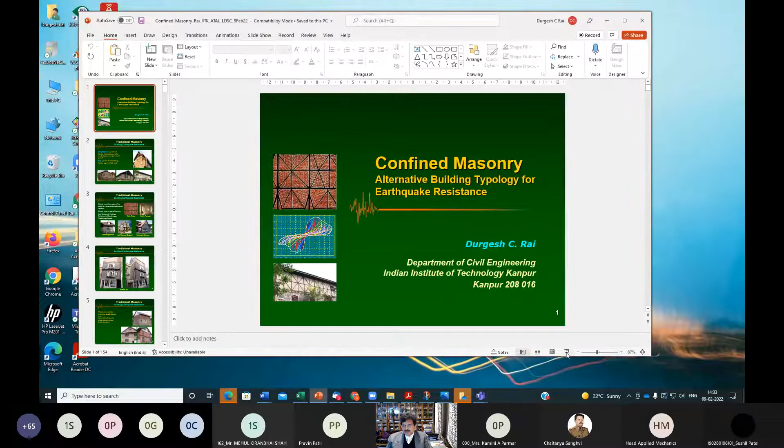Thank you. Good afternoon to participants, and it is really a pleasure to again connect with you, now with a different topic. As Mr. Patel mentioned, in this hour and a half we will talk about confined masonry, an alternative building typology for earthquake resistance.

We will see that earthquake resistance is not a new phenomenon. Earthquakes have been as old as the earth is, and human civilization has always come up with ideas, schemes, and techniques to protect dwellings and structures from devastating earthquakes. The problem is still the same as it was centuries earlier.

If you visit areas which have been more earthquake prone, such as in our Himalayan regions, you will see that the construction is of a little different kind than what we see in modern construction, especially after the colonial period, and the kind of influence that the British had on our construction in every sphere of life—building construction was no exception.

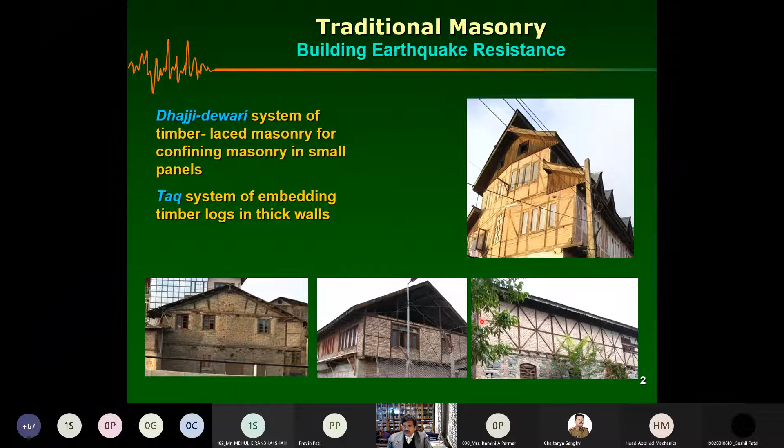The other system has logs of timber arranged in horizontal and sometimes vertical fashion, connecting thick walls that go all around the perimeter of the structure. There are definite advantages to such constructions, especially in earthquakes, and it can also be a very artistic expression for the structure.

This is not only found in India. If you go around the world to countries often visited by earthquakes, you see similar systems, like the Himis system in Turkey, in Portugal you have Gaiola, which is again timber-laced masonry, and similar systems in France, England, and Germany.

This is for earthquakes and also for other dynamic loads that can come from blasts or mining. This store is in Durham downtown, and Durham used to be a mining town in the UK. Because of mining blasts, the grounds used to shake, so structures had to be built to resist that shaking—again you can see timber-lace masonry. This building is preserved to show how all the buildings were in this town 300-400 years ago, when it was known for mining.

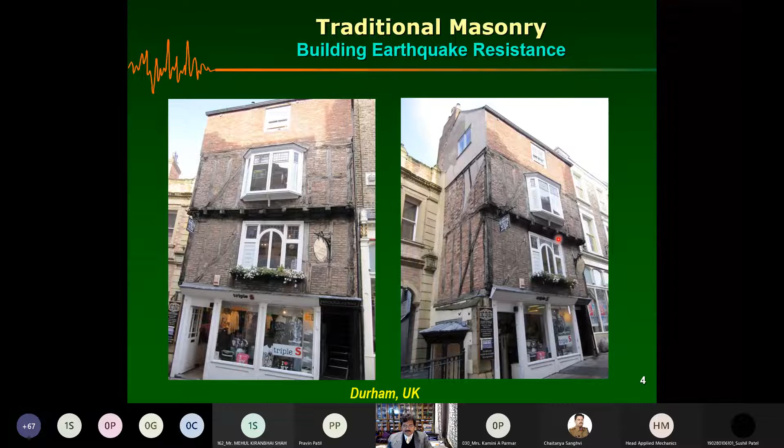There can be many variations—using dressed or undressed stone where more shear is expected, but as you go up, there could be a full brick wall, and further up the amount of masonry reduces in thickness while the timber frame increases. This could be just a half brick wall, so that's how you can see the transitions.

If you go really far back, even in Greek and Roman culture, you will also see the judicious use of timber and stone masonry.

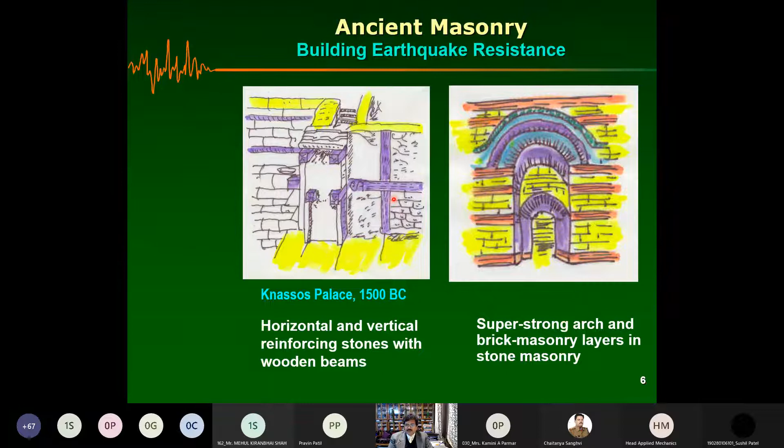Also consider the stone masonry and brick masonry, the layers of brick masonry. The central theme is that you have a stronger, more stiff stone interspersed with softer, flexible brick. Same thing with timber - timber is good in tension and provides binding and bending strength compared to the somewhat weaker masonry. So people have been using these dissimilar materials to create a structure which is more resilient.

There are many ways to explain what the timber is doing. First, you can think of it as a shock absorber, because the softer material is more compressible compared to the surrounding stiffer material. Another function is that it provides a slip plane where these units of masonry can move and slide along, dissipating energy through friction. It also adds to the flexibility of the system.

But being connected, it provides a kind of tying action, not only in the vertical plane but also in the horizontal plane, maintaining the overall configuration of the structure. Further, masonry is filled in small panels, reducing the span between supports. So the effective slenderness of this segment is very small compared to if there were no support, which would be the unsupported height. That enhances its out-of-plane stability.

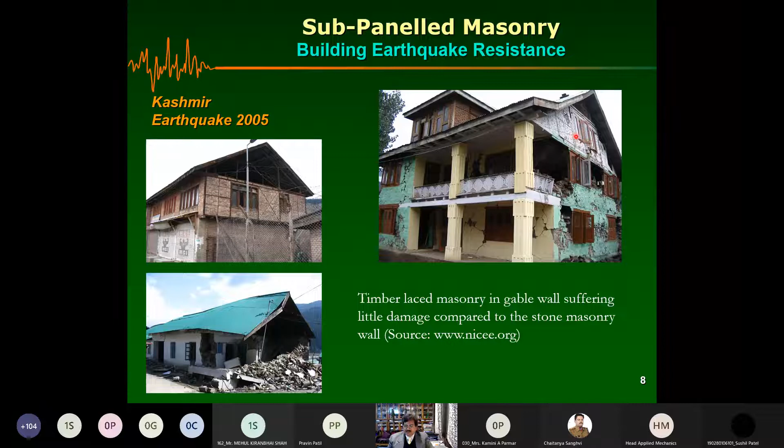In terms of performance, you can see that their performance is much better than the so-called modern random rubble masonry or ashlar masonry. Even this very old and not properly maintained building has done pretty well, unlike what you'd expect from a combination of random rubble and Dhajji-dewari, where you'd expect larger acceleration. The masonry has remained quite intact, with similar performance in many structures.

I'd like to take you to a building constructed in 1932 for the Medical Research Center for a German group. They wanted this research center built at Naggar, near Shimla in Himachal Pradesh, and hired an architect from New York. He visited the area and found that people traditionally had been building timber-frame laced masonry structures, and such structures had done well in the 1905 Kangra earthquake, where British-built structures did not do as well. So all the reconstruction, even by the British, was in this Dhajji-dewari construction. He proposed and built this complex in 1932. These are some images - this structure still stands today after surviving many, not big, but definitely many small earthquakes. This picture was taken in 2009.

The first magazine of the center talks about the building. I'm quoting: 'This method of construction is known here as Dhajji Diwar construction and has proved to be the best, if not the only, method of construction that resists earthquakes, which used to be quite frequent in this region. Most of the government buildings in Dharmsala, for instance, are built in this style and have proved to be the best. It is interesting that in its essential principle, this mode of building rather resembles the steel structures of modern skyscrapers' - as you can see, coming from an architect from New York - 'with the difference, of course, that wooden beams are used instead of steel girders. Thus, the wisdom of the people in its own way found the best solution, how to give utmost binding strength and rigidity with the local material available.'

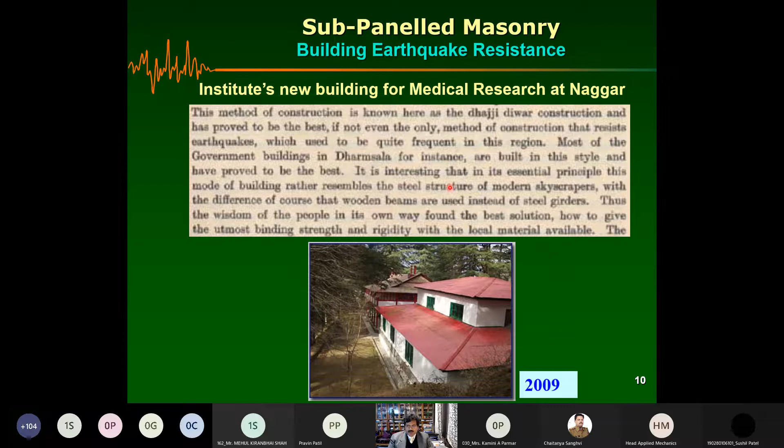So the point is that such structures have done well. Now, people talk about how we can't use timber because timber is not available, and it again leads to deforestation and things like that.

And there are options, you can continue the same concept with the modern materials, such as in this case, we did some experiment in our lab where instead of timber, we have used these precast beams or the tie elements. So in this way, this interior grid is created by the precast. And then when we subject it to the lateral loads, as we have shown in my previous lecture, they have sufficient deformation, or rather deformability, going beyond. Masonry usually cracks at 0.5%, and now you're going up to 2.5% or at least 2%, while maintaining significant

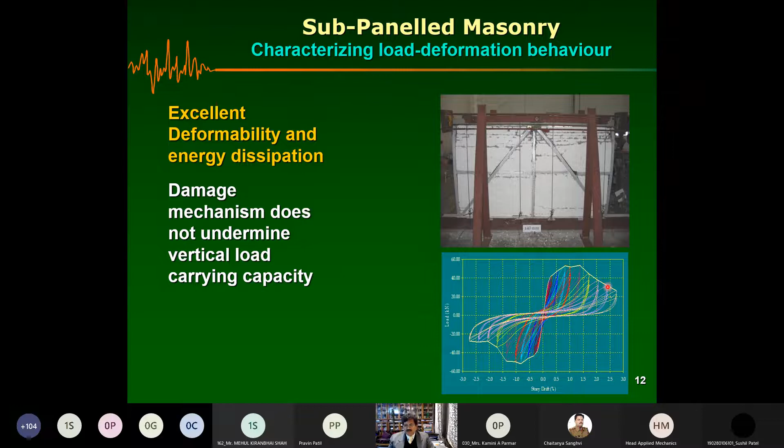strength, you see. And you can play with whether these members are continuous or they stop, only horizontal members continue, or you can have the diagonal members continuing. So you can play with this strength and stiffness and still design your wall. And what we are doing is that at least you need the confinement from all around, and then internal confinement can add to your stiffness.

If there's only horizontal, vertical, not continuing, there is a marginal improvement in the stiffness. But the moment you put the diagonals, then you increase the stiffness significantly. So if you want this stiffness, then you can add the diagonals. And if you want only confinement and not so much the increase in stiffness, because increase in stiffness means a decrease in the natural period. And if you remember the response spectrum, you tend to attract more forces.

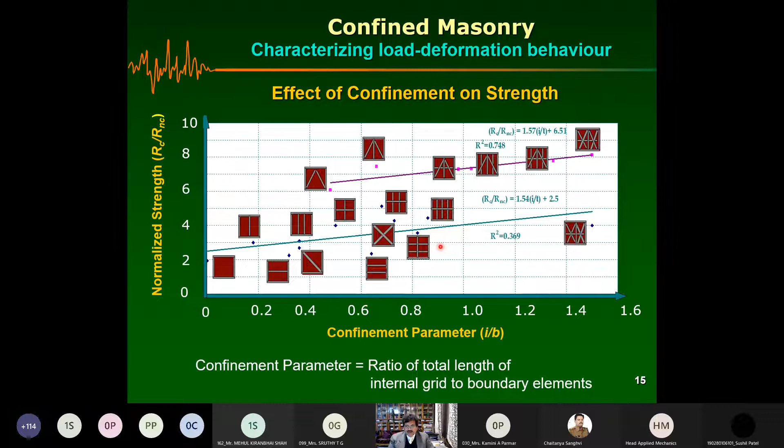OK, so we need to have a suitable balance of stiffness, so that the forces are low and at the same time deflections are not large. And same thing we go with the strength. You see that. So these are some experiments and some computer simulations. You can see the significant strength we can have when we have the continuous diagonals and then just the simple horizontals. So we have some relations developed that people can use.

But one of the major concerns in masonry is that the same wall is simultaneously being subjected to the in-plane load as well as the out-of-plane load, because earthquake has all the components, so even if we resolve the components along the principal axes of the building, you have both in-plane forces as well as out-of-plane forces. And the member being very stiff in-plane, it gets damaged very quickly, and then it's being pushed by the out-of-plane forces.

So it's very, very important to know what this out-of-plane capacity is while the wall has been damaged. OK, so typically we expect that masonry cracks at 0.5%, but then we want this to be intact at something like 1 or 2% drift, you see. So this is the nature: when it's uncracked, it has certain capacity, but that reduces as the in-plane damage continues, and then it reaches some residual strength. OK, so we need to evaluate this, and to know whether this system is better than the other.

So in experiments, we can apply out-of-plane shaking. That's a more realistic simulation of the out-of-plane loads on that structure. So you can put this specimen on the shake table and shake it in out-of-plane directions. And for the in-plane, I can apply a known amount of damage. So I can apply 0.5% drift for one cycle, create some damage, and then run the out-of-plane tests. So this is one way to utilize two different testing schemes to evaluate the out-of-plane resistance of cracked masonry.

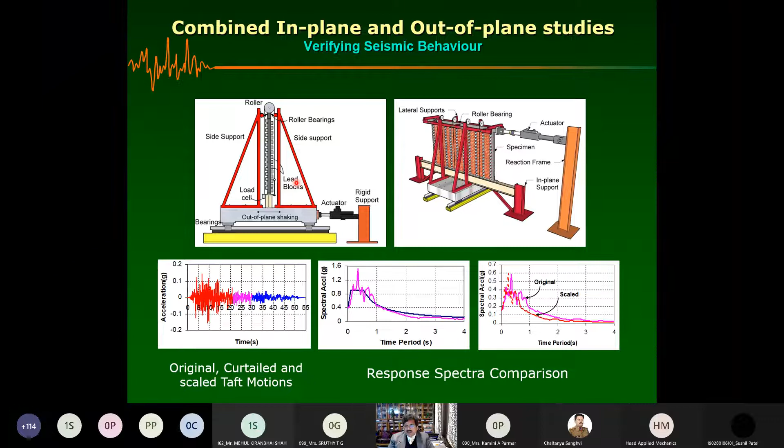Cracking is not antithetical to masonry design, as in concrete. So the idea is that you can tolerate a certain amount of damage as long as it is able to carry the vertical loads. OK, so that is the approach in designing our system. I think I had played this video at that time as well, but this time I would like you to focus on the drift levels.

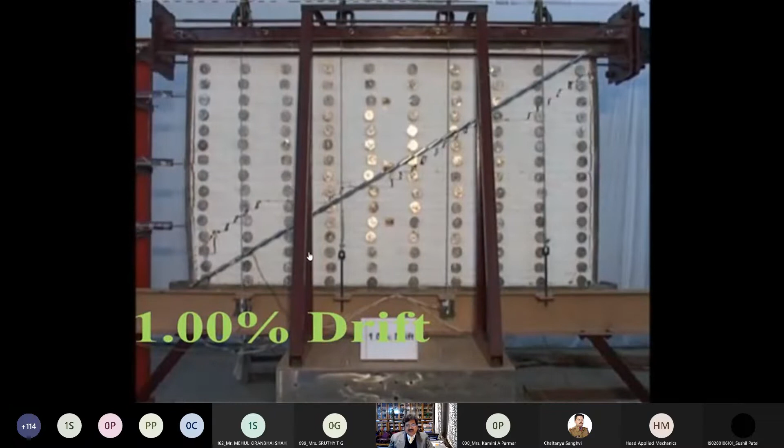So 0.5% drift level, that's what we call damage state 1, and then we are applying the zone 5 level earthquake motions. OK, so what's more important is, this is a half-scale replica of your 5 meters here, 3 meters this way. So these are 1.5 meters versus 2.5 meters, and the wall is 1 brick. So the H/T ratio is close to 30, or between 25 and 30. OK, and now you could see that it collapsed much earlier.

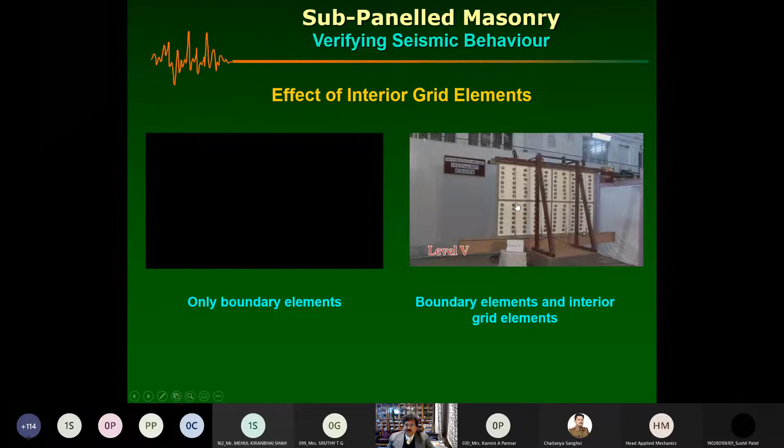But just providing two elements, now you're dividing horizontally as well as vertically. Vertical is more important because now the unsupported height is only half of that, meaning the H over T ratio has been reduced to half, something in the range of 15. Okay. And if you recall from our previous presentations, this would do much better. 0.5% drift, and then you can see the damages. And we are applying this L5. L5 means the zone 5 level out-of-plane shaking.

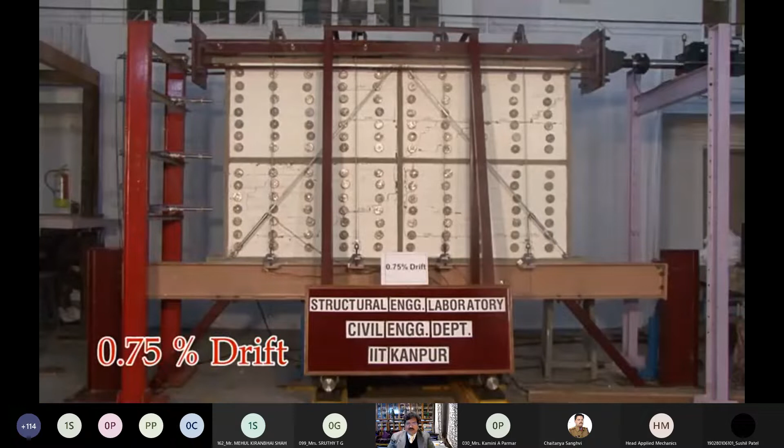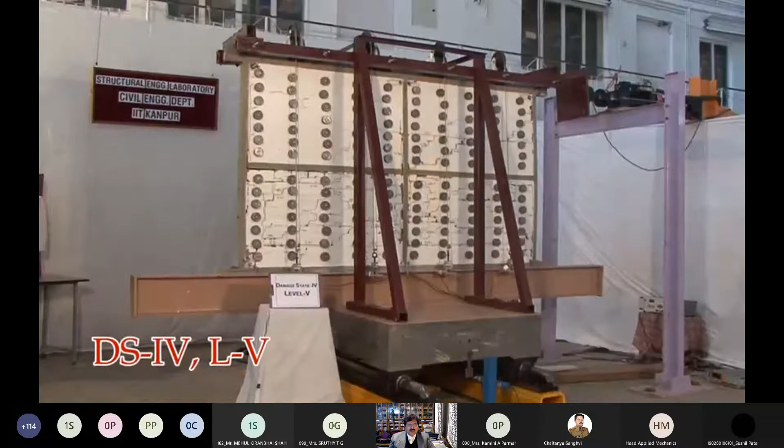And you can see that the loads are distributed. Here is the vertical path. These horizontals are not continuous. They stop. Only vertical is continuous. So this is much better performance by just providing these internal elements, and you could go up to 2.20% drift.

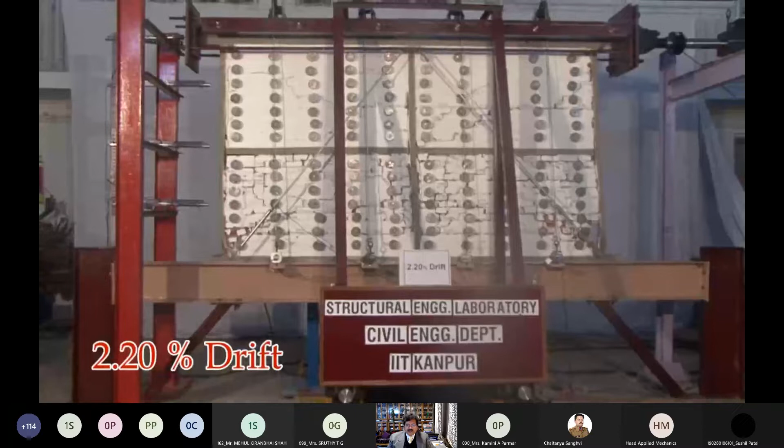And masonry is damaged in plane. It's dissipating a lot more energy. It can actually resist even much bigger earthquake while maintaining its vertical integrity. It still can carry the vertical load. And as I said, this is just we wanted to feel it.

We're applying some sinusoidal load. And you could see that the hysteretic behavior, of course, is pinched somewhat, but what is more important is its load carrying capacity. You see that it still maintains the load.

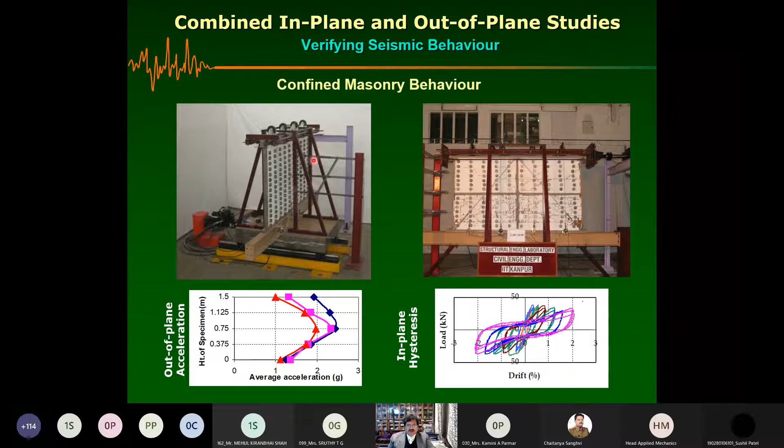And this is showing you the out-of-plane acceleration. So of course, it is held at top and bottom by the floors, and you can expect the maximum acceleration somewhere here at the mid height. So we had the accelerometers, and we can measure the responses. Okay. So much for that.

So what is the traditional knowledge we are using in the modern context? We know how to build the unreinforced masonry, load bearing type, and we also know how we make the reinforced concrete frames. And then we use this brick masonry as partitions, and we consider them as a non-structural element.

However, during the earthquake, they are more structural, and sometimes they have detrimental effect on our reinforced concrete frames, because the reinforced concrete frame cannot work in the presence of the masonry there. So there are interactions, etc. Just saying that I'm ignoring them in my analysis does not mean that they will not participate during the earthquake loads.

So looking from our past experience, what we can think of is that we can use these columns as confining elements for our masonry. And how can we do that? We have to just change our construction sequence. So first we have to raise this masonry, and then pour concrete for the columns.

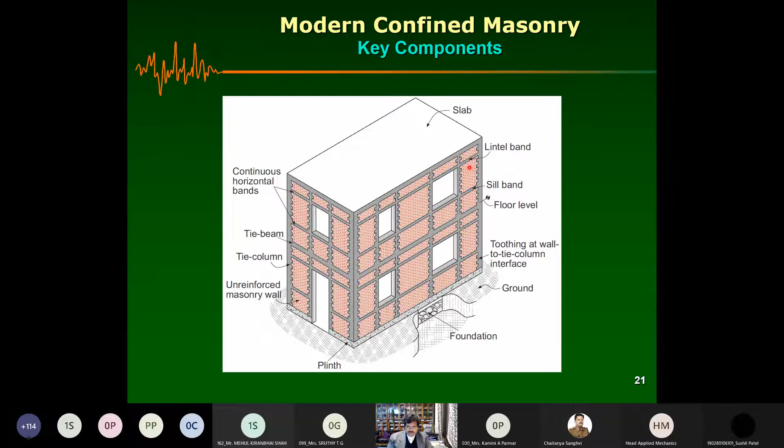Okay, so we have tie columns and we have tie beams here, and these can be referred to as your lintel band and sill band. So the construction is very similar, and as I said the other day, in Latin America it is practiced, in Chile and many other countries. This is the way most of the modern constructions are done, especially for residential purposes.

So you can see that this is here. There is no sill band, but they make sure that the opening is finished with the floor beams, so only at one end, and always the tie columns run around the openings.

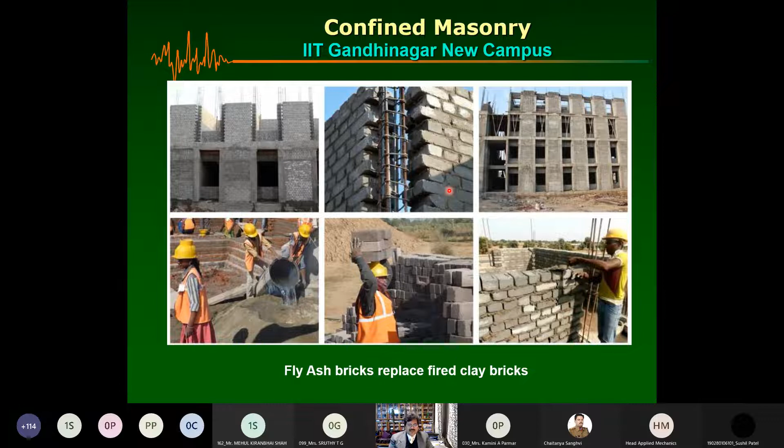And a similar system is adopted in IIT Gandhinagar for construction, though you can see the difference here is a fly ash brick. So you can use clay bricks, you can use fly ash bricks, as long as you have sufficient compressive strength, which is what you need. Here you can see the 4-story constructions using these fly ash bricks.

So if you see the resistance mechanism, you have a load bearing wall, so no problem for vertical loads. For horizontal loads, this side goes into tension, this into compression. This is more like a shear wall action where the boundary elements resist overturning. Overturning is resisted by these tie members, and shear is resisted by the masonry.

And this can only happen if this interface is able to transfer the stresses. So that is where the toothing, etc., plays a role, so we need to make sure that this does not separate.

And in contrast, what happens in your regular infill frames? When you apply this, the frame is deforming, and therefore the load transfer takes place through the diagonal action where the masonry is in contact, a very complicated transmission of forces. You do not know whether it is one strut or a strut of what width, and that depends upon the contact. Contact depends upon the beam and column flexural stiffness, and then the masonry.

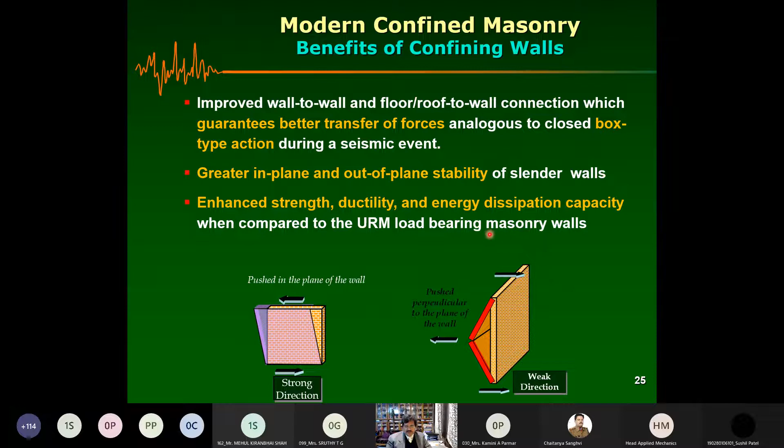So even under cracked conditions, you have better out-of-plane resistance, and then greater strength, greater ductility, and greater energy dissipation potential compared to URM load bearing masonry walls. So the system lies somewhere between reinforced concrete and URM load bearing, but performance wise, it's much better than unreinforced masonry load bearing systems.

And we did some tests to show how much toothing is essential. Should it happen every course or every 2 courses? And what is the role of the toothing? Because certain codes allow that toothing is not essential, but the tie columns have to be cast after the masonry is raised, so that the basic principle of confined masonry is not compromised.

But the role of toothing is something which some researchers or some codes have been kind of underplaying. So we wanted to see how it plays a role. So again, I'm showing you the similar videos which I had shown last time to refresh, the traditional infill.

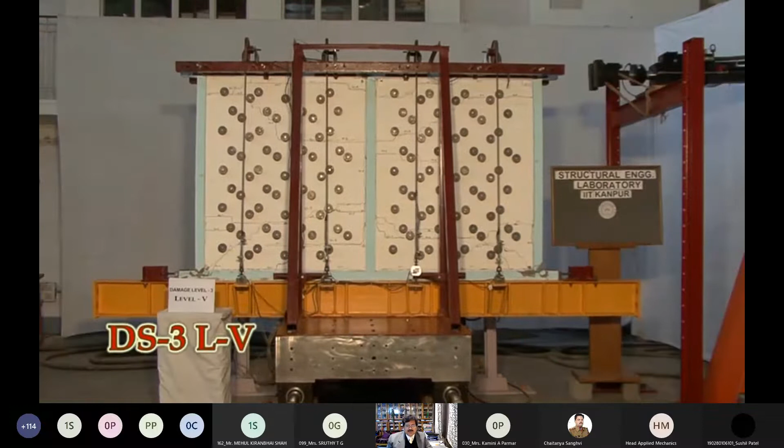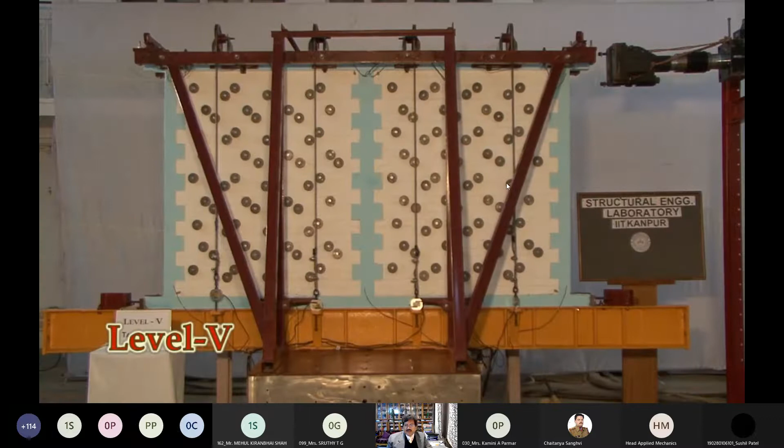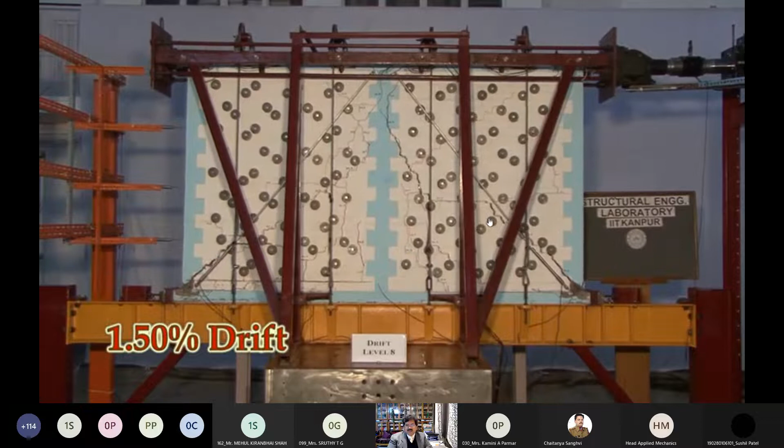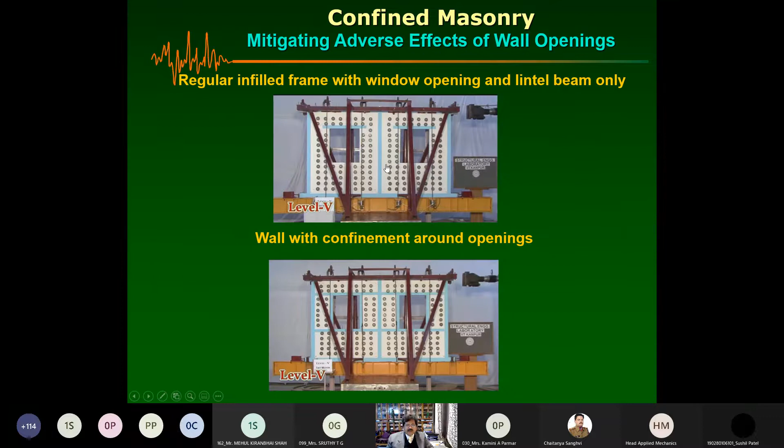Survives, I think we have done pretty well. 2% and still able to carry the vertical load. You can see that through the cable we are applying the vertical load. So this is the case, and then you can also see what happens if you create an opening.

This is a traditional construction where you infill, and then of course there is a lintel band, not continuous. And as we have seen last time also, this is the plane where the frame has the weakest shear capacity. So you'd expect that these piers will be subjected to most of the damage that is observed. And you can see that these piers are of such proportion that they are rocking inside.

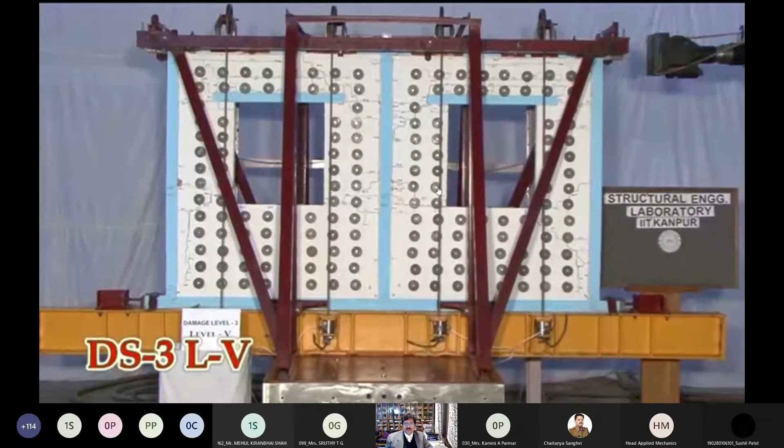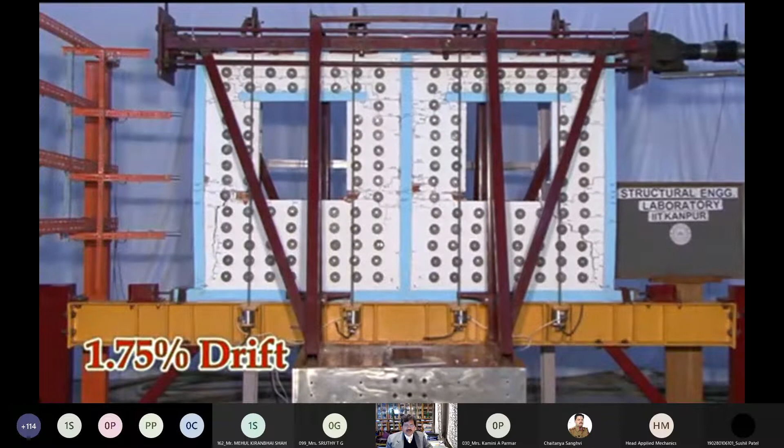So you can see the pushing of the toe here, and on the other side, and during the out-of-plane actions, this loosens and can fall out. And you can see the masonry here is not being stressed because this is not how the load path is. They are pretty much not participating in load. So you can see that the chunks have come out, and this is in bad shape.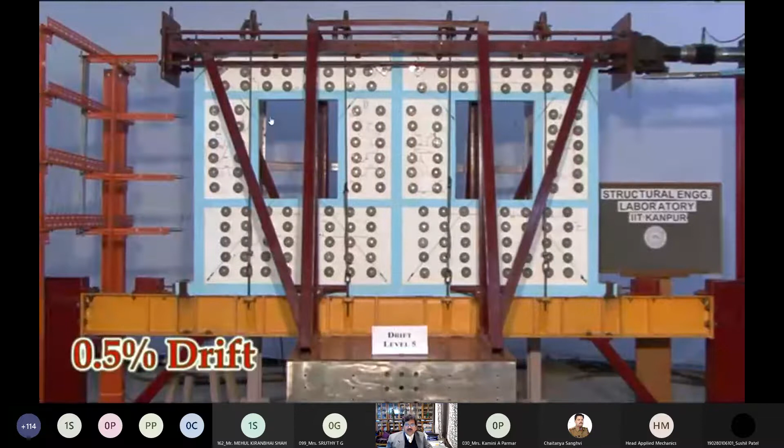But its counterpart, when we have the sill band and a lintel band, and elements which enclose the openings. So now you can see the pier, which is critical, is now actually confined, and you can see that the damage level is much smaller. And now the sill masonry here is also participating in load sharing. Also the spandrel masonry.

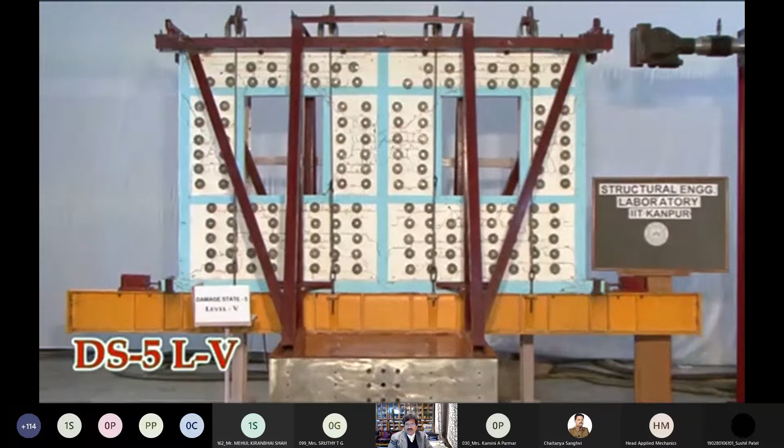So you can see that this is in our modern concrete and brick masonry. We can create a system for better earthquake resistance. And another important thing to note is the aspect ratio, or rather the distortion of these openings. That is also very limited. So there is a tendency, a likelihood, that these doors will open after the earthquake.

So here we can see that we are applying 2 times, 3 times of the zone 5 ground motion in the vertical plane, and it is almost intact. So this is just showing you the crack map of the structure at the end of the test. And this is your infill masonry. You can see all the interfaces, and when it's opening, then you can see the damages that we saw in the

piers. Okay, and once you have the confined masonry, you can see that this is working all around, and you can expect that this whole thing is like a shear wall system with the toe crushing at either ends. Okay, and then you have openings. Then this is, of course, the area where the slender piers are being worked upon.

And in this case, if you notice, the horizontal bands are not continuous, you see. So this is something they do in Latin America. They do not keep this band continuous. They take the tie columns from floor to floor, but they do not take this continuous. What we did in our study is that we need to keep this continuous, and tie columns don't have to be continuous, but of course they must run around so that they stiffen this opening.

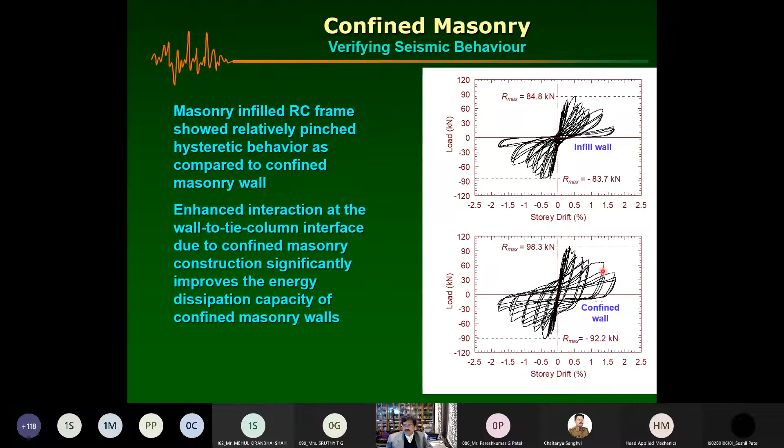So what it means is that even with the presence of this opening, if they're well confined as in our system, we do not lose any peak strength. And these continuous horizontal bands are better than the vertical tie columns. Okay, so this is another comparison. Now you can see the drift levels, which one is dropping, and I'd like you to focus on this infill masonry, which is this blue line here, and the confined masonry with the 2 openings for windows, which is the dotted black line, you see.

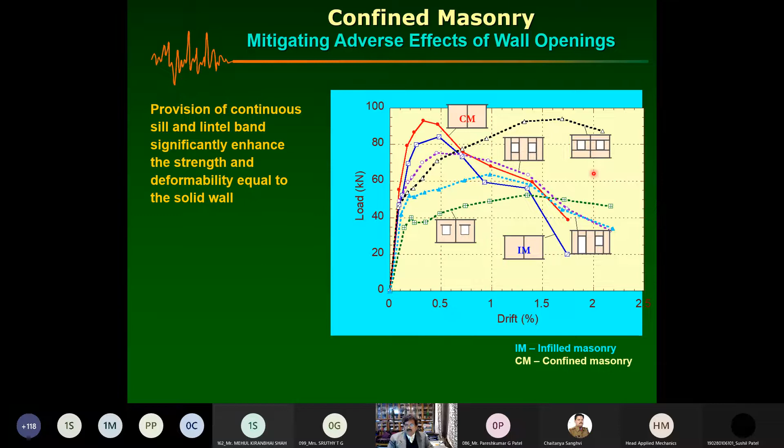So it reaches the same strength, and this deformability is what matters. And of course its stiffness is much less because you have the openings, so that causes the decrease in stiffness. And that you can also see with the solid wall confined masonry, which is the red line. So this has a smaller stiffness, but not very different. So these are some quantifications of the results, and that helps you in developing the design manuals and codes.

And I will now talk about some of the manuals which we have brought out from the National Information Center of Earthquake Engineering, which I hope most of you are aware of. This was the first kind of manual, by Dr. Brzev, and then there's a Hindi translation. And then recently, with all these developments, we have revised it and given more input from the architectural point of view by Dr. K.

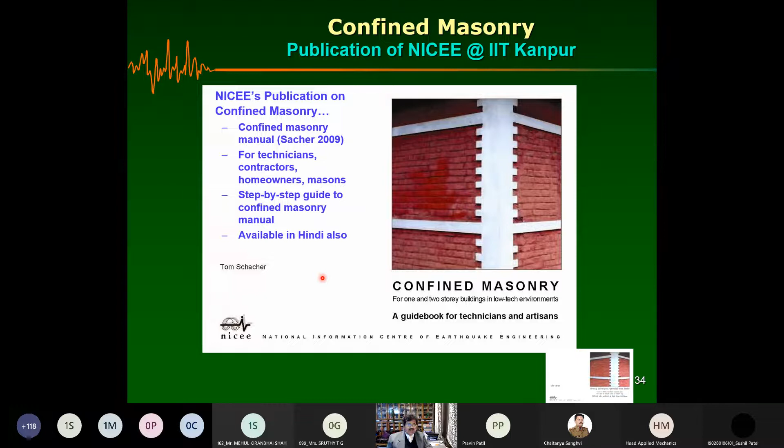Mitra. We also have a guidebook for technicians and artisans prepared by a Swiss architect, and it gives you a step-by-step guide for construction with sketches like this. Okay, now in the NBC 2016, there is a chapter referring to clause 8.9 about confined masonry building construction.

So it actually introduces the construction type, but does not give you much details. It's more prescriptive and something for the 1 or 2 story buildings. Now we have brought out a code which is under discussion with CED 39, and we submitted long time ago, but the way the BIS works, it takes much longer for the code to come in final form and the published form.

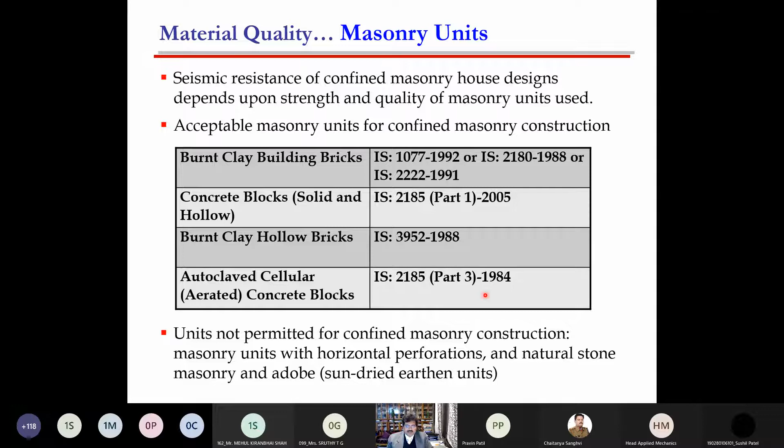So I will try to show you some of the important part of this code, and where you can engineer your confined masonry, not just the prescriptive. So it talks about that you can use any kind of masonry unit. You can use the burnt clay, even the fly ash bricks, as I showed you, or even AAC, but you need to have a sufficient strength. You see, that is coming from your calculations.

At least for 2-story building, you should have 3.5 MPa. More than 2-story building, you need 7 MPa, and concrete blocks should be more than 7 MPa. So if you're using AAC, make sure that it is 3.5 or 4 MPa.

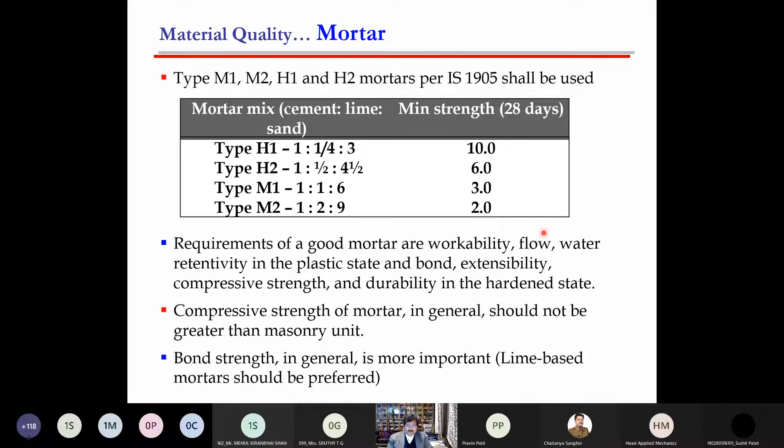About the mortar, it's better to use the cement, lime, sand mortar, lime mortar. So this is not very expensive, medium mortar M1, 1 part cement, 1 part lime, and 6 parts sand. It gives you the strength of about 3 MPa. What you need is good workability, and adding the lime does that. And somehow use of the cement sand mortar is not good, and this is kind of again a deviant behavior propagated by our building codes.

So concrete should be at least M15 for your tie columns and tie beams, and reinforcement you can have Fe415 minimum, but you can use higher grade if it's not available. Mild steel can be used for the stirrups.

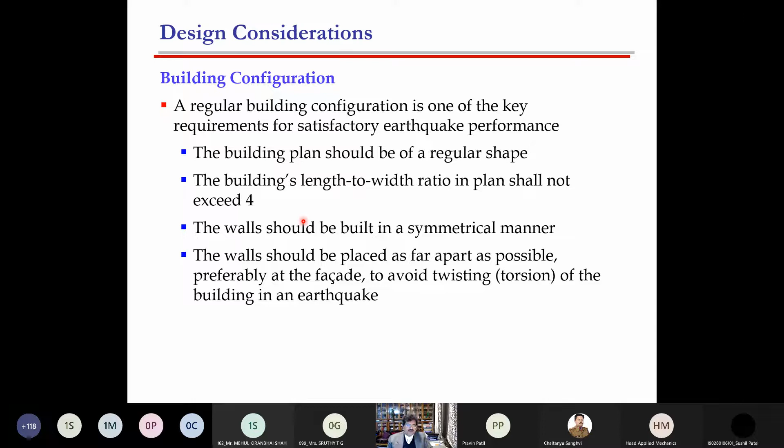Building configuration, as in any seismic design, it should be very simple, regular shape, length to width ratio should be less than 4, so it's not too narrow. Configuration, walls should be symmetrically placed. Okay, so these are some guidelines that you need to have the minimum amount of walls, considering the vertical, some of these offsets are not good. Very similar to your IS 4326, is just reminding you here as well.

Now, if you see the plans, this is not good. Reason is that this arrangement has more walls for earthquake in, let's say, north-south direction, but in the east-west direction, you have very few walls. So this is not good. So you can arrange it something like this, that there should be walls in both directions. Same way in this, and these are the things which architects should do at the planning stage, that you should have sufficient number of walls in both directions.

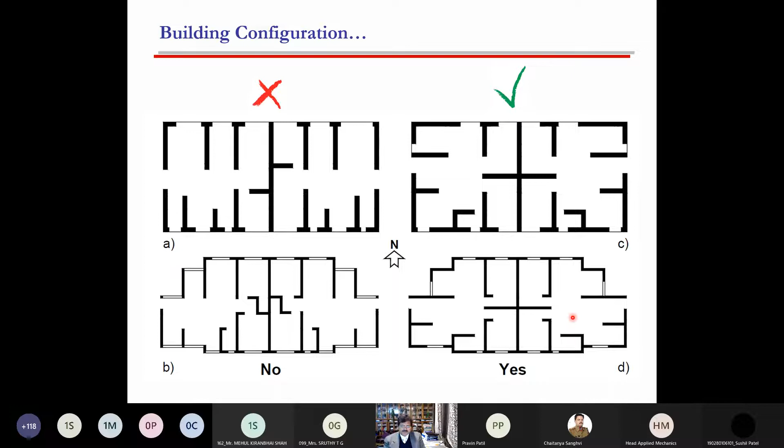No offsetting or discontinuous walls. So this is also not very good for confined masonry, and an arbitrary placement of openings makes it harder to place your vertical tie elements, and even if the vertical, then you may not run your band. So there are some restrictions on that. As I said, slenderness should be less than 25. So the H/T should be maintained. So if you're going more height, then of course you have to use a thicker wall.

The tie beam spacing should not be more than 3 meters, and the column is 4 meters, because then the effectiveness of this reduces. So you need to have a tie column spacing not more than 1.5 h. H is the story height. So these are some rules based on the configurations, something that works. And the tie column and tie beam dimension is actually 6 inches or 150 mm times the thickness of the wall. And this is another plan showing you where you should place your tie columns and the wall.

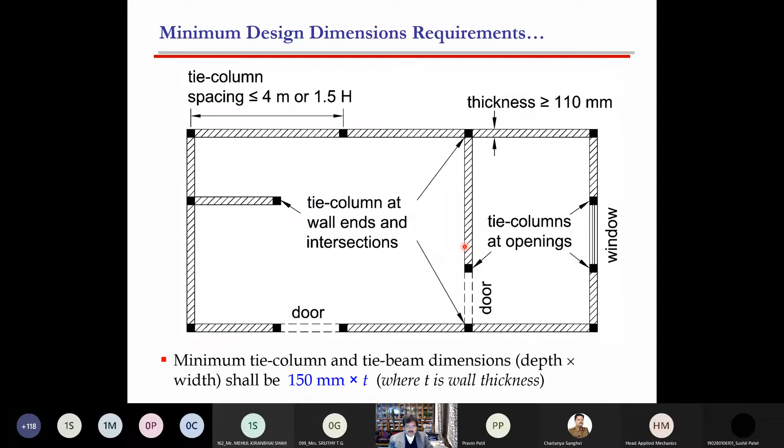Okay, so the minimum thickness is 110 mm. H/T ratio should not be more than 25. Unsupported wall height should not be more than 2.5. So height to width ratio of wall should be kept less than 2 for better lateral load transfer. So if this wall becomes very narrow, then this is not very effective. So the idea is that you need to keep this tie column so that they're shear controlled. Now this wall here is more flexural controlled, which is not a better way of utilizing the material.

And then the parapets should be limited to 1.2 meters. Then comes the openings, small openings are better.

So the way we define it is that if the opening is more than 10% of the wall area, then it's large. Less than 10% is small, that's the rule of thumb.

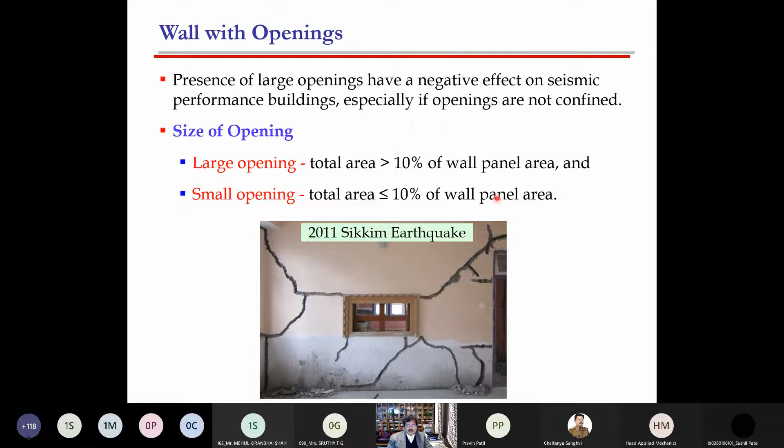And then large openings. So if you have large openings and they're not strengthened all around, then this wall is not resisting any earthquake load. So this cannot be used in calculations. You can make this, but it will not be considered to resist earthquake load, or this does not qualify to resist earthquake loads.

But if it is confined by these vertical elements, then you can. So you can take this area as resisting earthquake and this portion is resisting. So horizontal shear is resisted by this masonry and the masonry here.

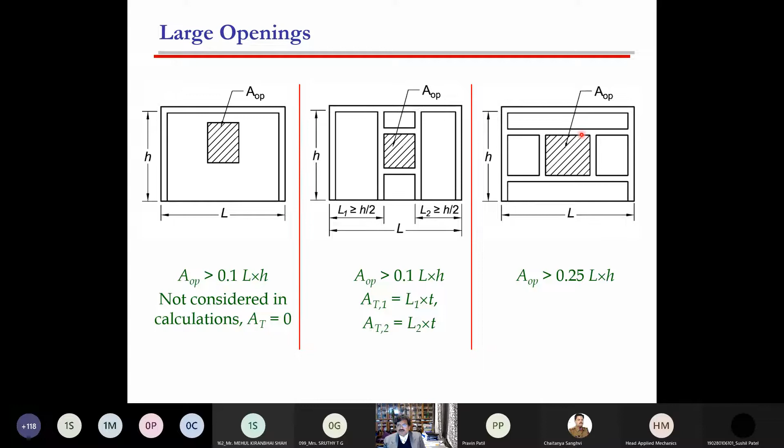Similarly, if it is more than 0.25, then you have to confine it like this. So these are some guidelines, and again the diagonal actions, because of shear, are predominant. So we don't want the opening to obstruct these diagonals. So if they're outside and small, they do not affect the shear resistance as much, but if they are within, then we have to make suitable adjustments.

The other question is how much wall is needed, that should be there to resist earthquake loads. So there is a term used called wall density or wall index.

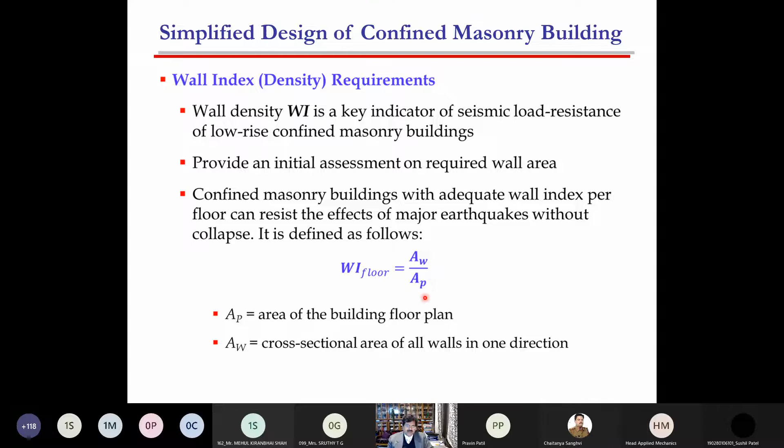So that tells us the total earthquake resistance of your masonry building, and gives some kind of initial assessment of how much wall area is required. So it can be defined per floor as wall index equals area of the wall divided by area of the floor plan, and this will be expressed as a percentage.

So they should be symmetrically placed by and large, and should have the same total wall area, now divided by the plan area is the wall index. Okay, so this is how we calculate this wall index, and this wall index of a floor multiplied by the number of floors will give you the total wall index that is required.

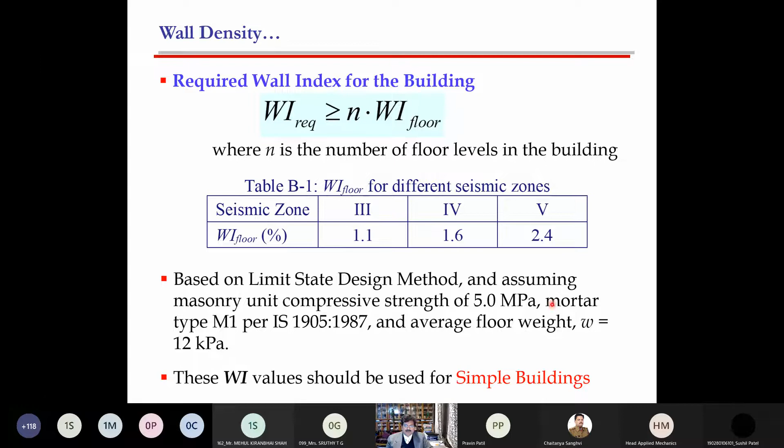So this is just for preliminary sizing, for simple buildings, these are the numbers, but you can calculate it by looking at the total horizontal floor force that you may have for your building.

So you know which zone you're located in, the time period of the structure, you can calculate SA by G, you can calculate the AH from IS 1893, and then this horizontal seismic coefficient multiplied by the weight of that floor gives you the total force.

And then we take this load factor of 1.5, divide by the masonry shear strength divided by the partial safety factor, so this will give us the total wall index for that floor. So that's a simple calculation, and it's good enough for low-rise buildings, and of course it can be extended to buildings of any height as long as you have masonry which can provide it.

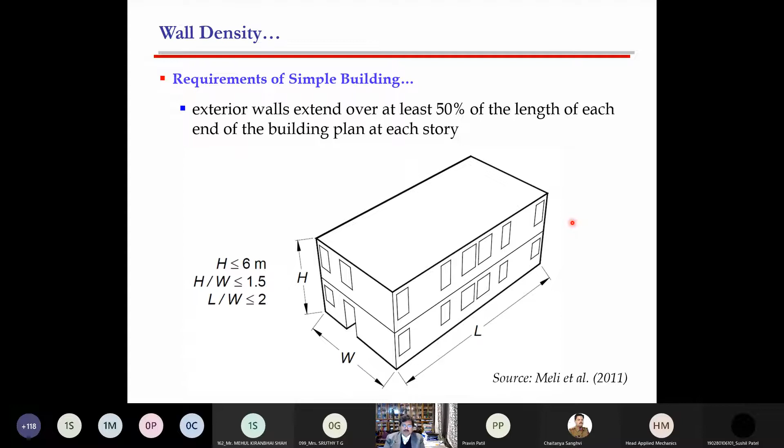And there are many other suggestions that for simple buildings, the height should not be more than 6 meters and things like that. So meaning that for a two-story building, we're considering it simple. So we can design just based on this wall density and not worry about the dynamics and other stuff.

But we can design this as we do for reinforced concrete, or we can follow the same limit state approach. Design loads will be the characteristic load multiplied by the partial load safety factors. We can have the load combinations, and then the design strength of materials, which is characteristic strength of material divided by gamma m. Gamma m for masonry is typically taken as 2, as proposed in the code.

Because there are more uncertainties, more variations in material properties of masonry, we use a larger factor.

So the axial load resistance, you can think of as the area of masonry multiplied by the prism strength of masonry, and then we have 0.4 here, which you can think of as the reduction factor - same thing as the 0.45 we have for concrete FCK, and 0.75 for steel. And then you have this KS, which is the slenderness effect, or rather stress reduction factor for slenderness of the wall. So that's how you calculate the axial load resistance.

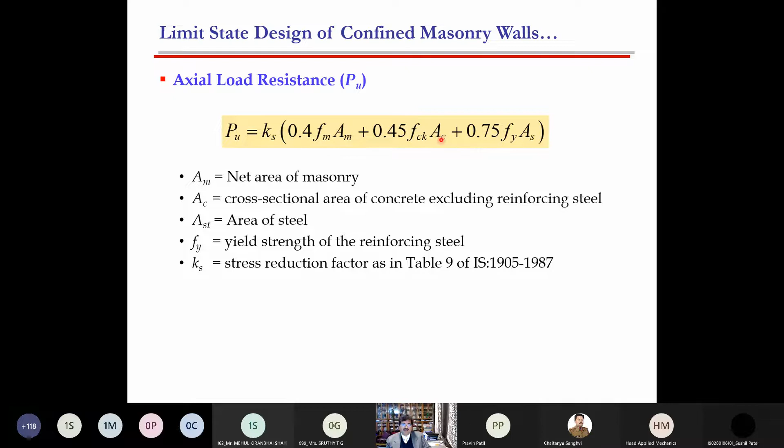So contribution of masonry, contribution of concrete, and contribution of steel - this portion is the concrete and steel, this portion is masonry. So I can calculate what vertical load this wall is taking by using these relations.

Now, if the moment is present because of the lateral load, then you have the interaction of axial force and bending moment. Same thing as in concrete, you have the PM interaction curve.

And for the shear, it's quite complex. You have the diagonal strut model, which is what we use to develop these equations. What happens is that some shear is taken by the masonry and some by the tie columns. If you look at displacement versus story shear, point A represents that

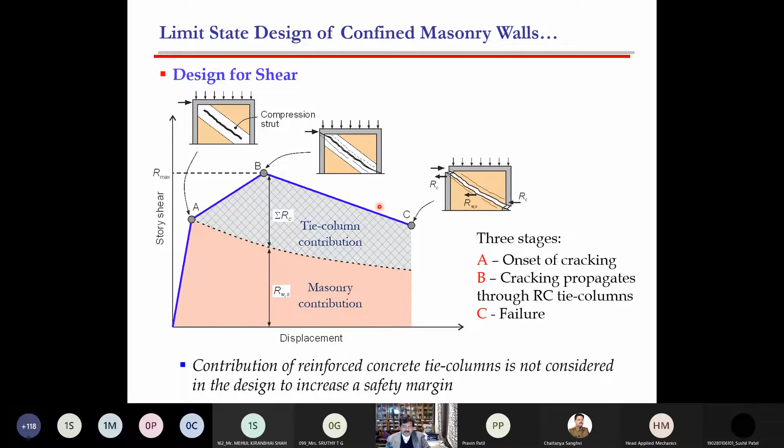So we can see that this gray area is your tie column contribution, and this red is somewhat your masonry contribution. At any instant, both tie column and masonry are contributing and resisting the shear. So it's quite complicated in that sense.

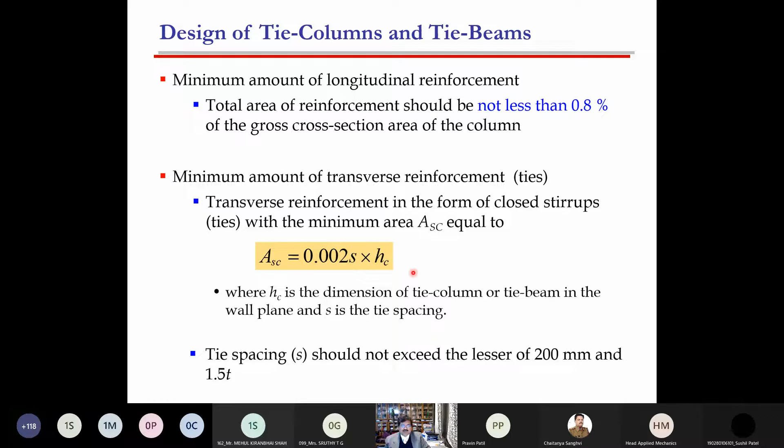And then there is a minimum amount of longitudinal reinforcement, same as in reinforced concrete - 0.8%, and people even talk about this being reduced. And then there is a minimum transverse reinforcement, very similar to RC construction.

Now the major project that we have executed in India is on the Gandhinagar campus, where the hostel buildings are 4-story and 3-story staff and faculty quarters, built in confined masonry.

They used fly ash lime gypsum brick, not clay brick, because they had to use this fly ash as they are close to the power plant, but in the foundation they've used clay bricks.

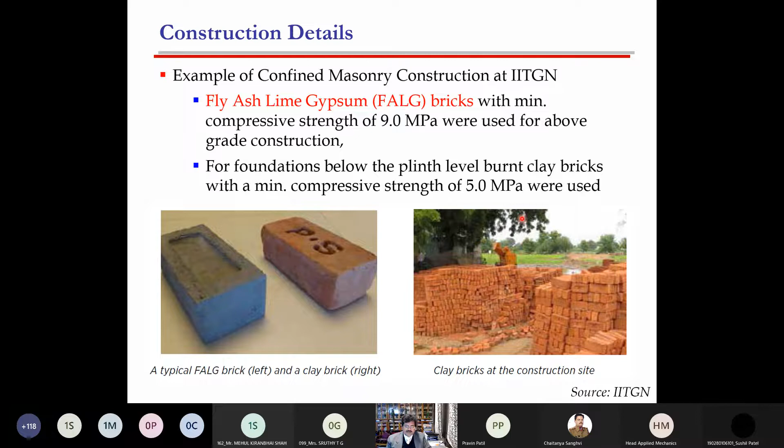So that you can set up a plant there, but you have to make sure that it is 4 stories, so you have to have at least 9 MPa strength. So they went for cement lime sand of type M1, which is 1:1:6, concrete M25.

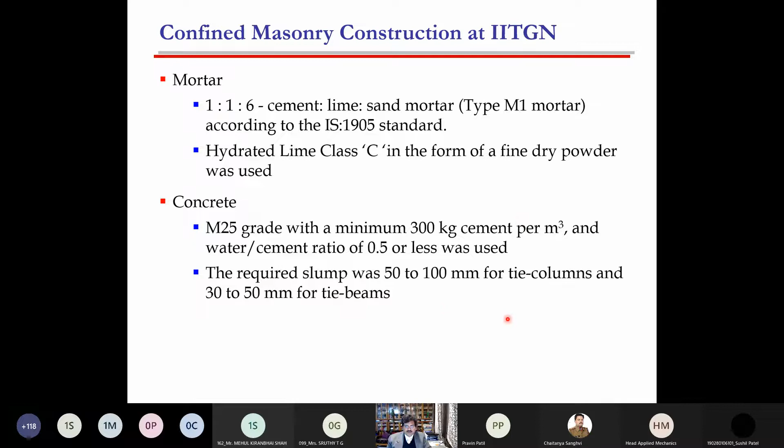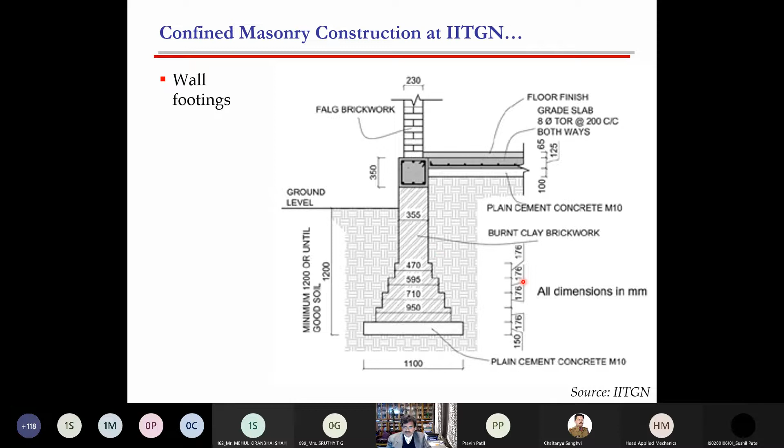And then they have a plinth band over which this masonry brickwork sits. This is clay brick all over, and this is simple. So you have the plinth band all around, and as you can see the tie columns are rising from the plinth band. That's simple, but you can raise it from the foundation too, either way is fine.

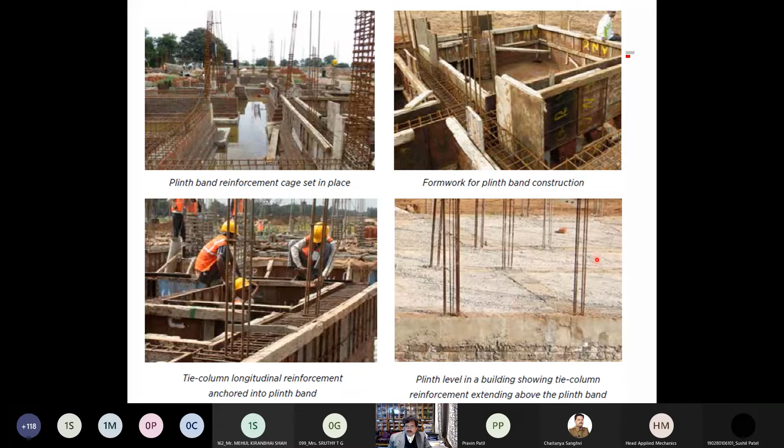So that's some sketches for the plinth band, and this is the construction of the plinth band, and then you can see this reinforcement of the tie columns. The bricks are soaked before construction. These are some pictures at the construction stage.

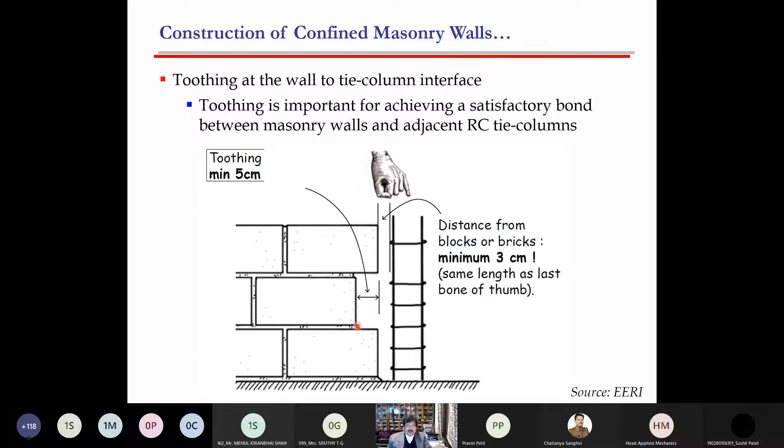And of course you have to create a toothing, so you have to make some gap, and this should be at least 5 centimeters. It's typically so that your header joints are broken, so they don't align. And you don't want too much, because if it's too much, then if you're pouring the concrete, it cannot go inside. So just enough so that the concrete can flow and fill this cavity.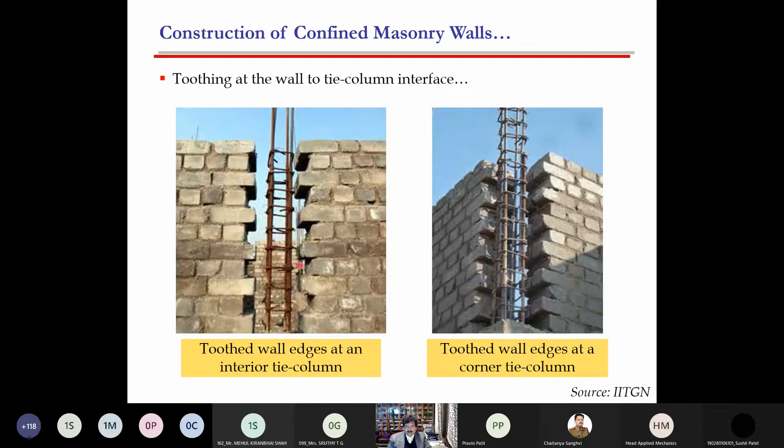This is what the toothing looks like at the corners, and these are more pictures. So usually you go 1.5 meter wall height, and then you cast the tie columns and continue, wait for 3-4 days, and then continue. That is how the construction looks like at various stages.

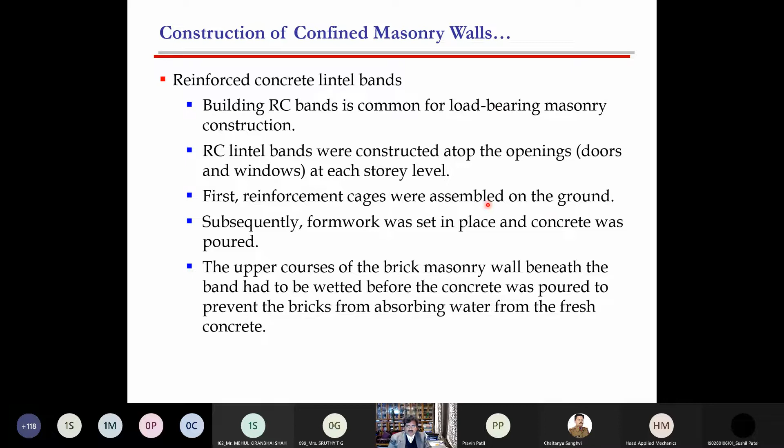And then the lintel bands, we just talked about what their role is. And as you can see, this is now the preparation for the lintel bands. They're done at the appropriate height. So you can see here the lintel bands.

And the way the construction was, there is a very small masonry between the lintel and the roof. So of course you can play with that, and if your openings go all the way up here, then you can eliminate the lintel band.

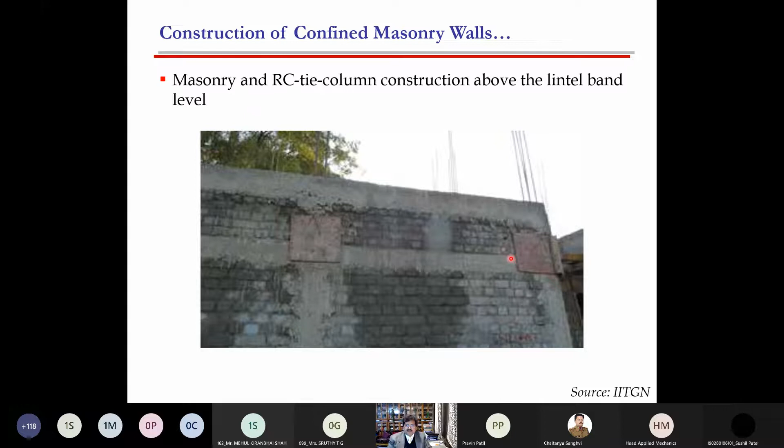Same rules apply for the reinforcement. You have to make sure of 90-degree hooks, 135-degree hooks all around, and use the deformed rebars. Same constructions, and these are some details, where you can put special confinement over s/2, where you can reduce the tie spacing.

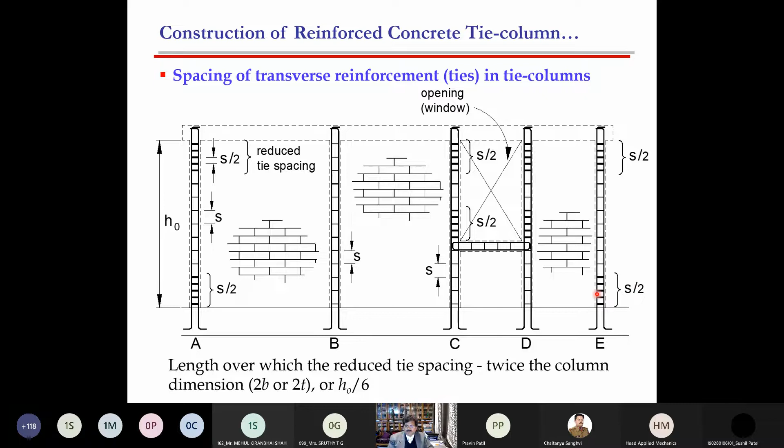As you may have seen, this works like a shear wall, so there is kind of a plastic hinging or toe crushing. So if you confine this area to be 2T or 1/6 of H0, then you get a little better performance, at least controlling the disintegration of concrete and masonry around it.

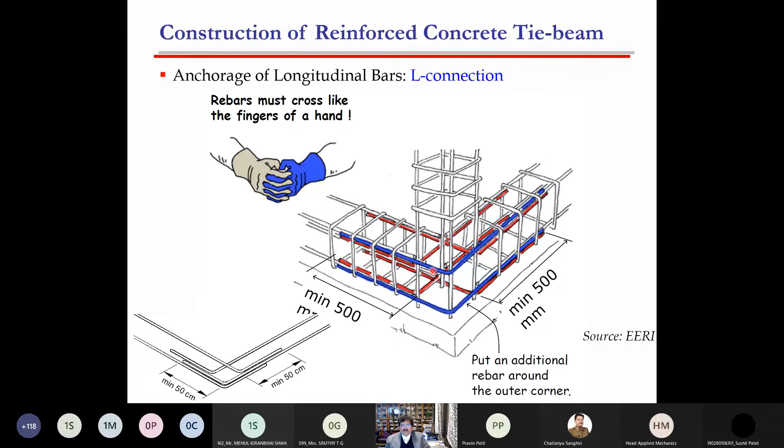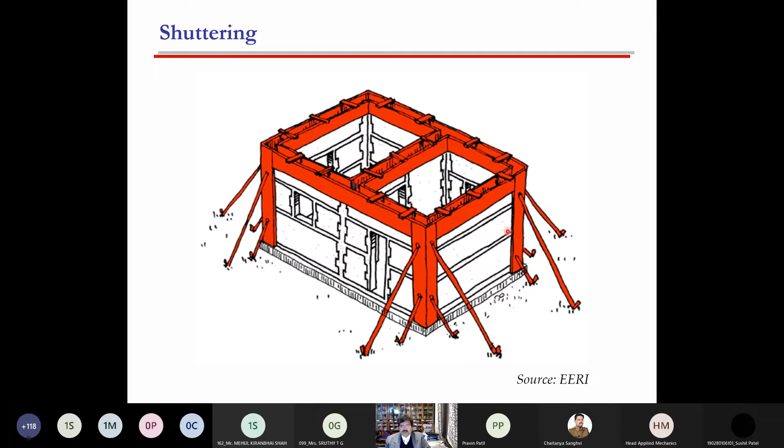The lapping, you have to provide 40 times because all these are tie members, meaning they're carrying the tensile forces. So at least 40 times of the diameter. This is another way of installing where you can pour the entire height in one go, but it is better to do it in steps.

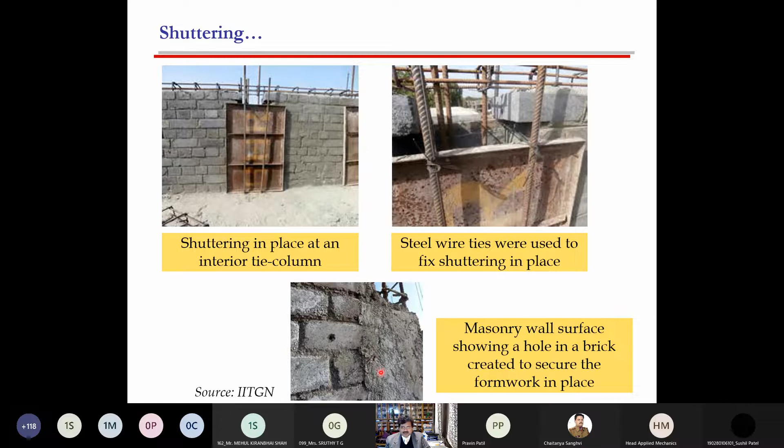So shuttering, there are many props you have to use to keep this in place. This gets actually tedious if you do not have room on the other side. So that's where you have to be a little bit more creative. In this case, you can see that the tying wires are being used to hold this formwork in place. And if you don't do this, then the concrete may flow out, and we have a little bulging, you know. Just like that.

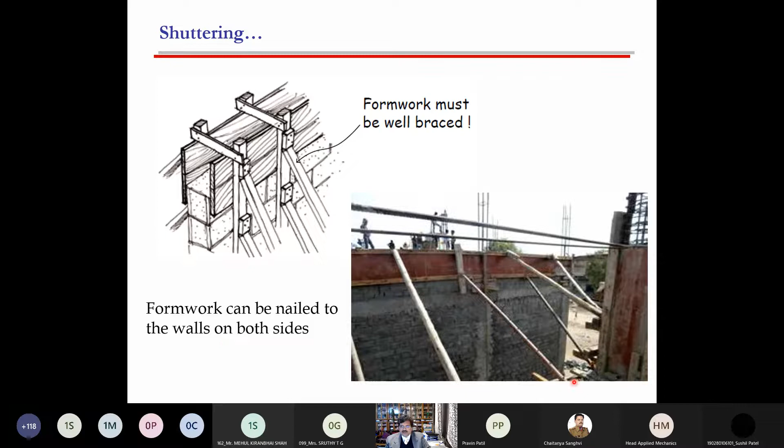So there are many. These guidelines show you some examples of what to do, what not to do. The formwork can be nailed to the walls on both sides. And then, of course, you go to pour the concrete on the roof to create the floor slabs.

Another thing is what the cost is, you know. So the structural cost for this IIT Gandhinagar project was 8,600 per square meter. For the faculty hostel it is 8,900. But then if you consider academic buildings, which are RC frame with masonry infill, it is 15,000. So there is saving in terms of using the confined masonry. Okay, so that's the one data that we have, which shows that you can have significant saving using this confined masonry.

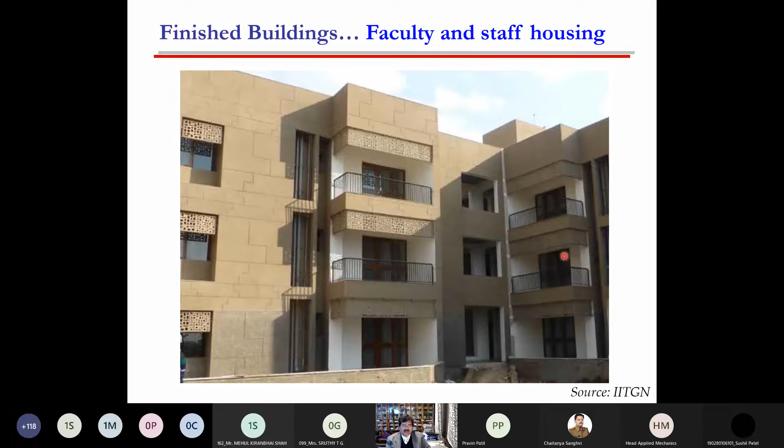And this is how these buildings look after the construction, after they're finished. So there is more information worldwide. You can go to the EERI website, Confined Masonry Network, you can get more information.

And I can conclude my talk by saying that, of course, this earthquake resistance is not something new. People have been trying, and one way was to use for masonry work the grid work of timber or any material which is good in tension to provide strength and stiffness to the system. And this modern confined masonry, as I talked about, can help you do that, and can be used for our modern, especially residential buildings where the floor or the span is not too large, and again, height is no restriction if you have good quality bricks.

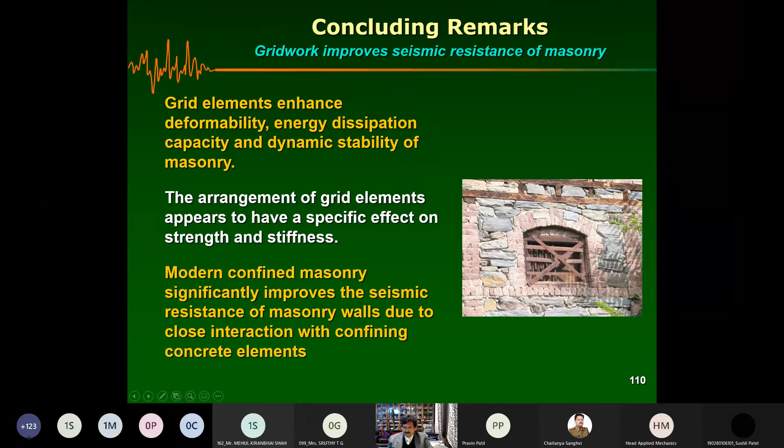Ma'am, you are unmuted, so you may ask. Am I audible now? I guess I am. Yes, you are. Yeah, good evening, sir.

So my question to you is two things which are confusing me. You had mentioned that the compressive strength of the mortar should be less than that of brick, right? Well, normally that's the way it is. You know, the compressive strength of the mortar would be less than that of brick.

Correct. So generally when we are working with masonry, sir, everything boils down to whether the mortar is stiff or the brick is stiff. Generally in Indian conditions, we see that the mortar is stiffer than the bricks. So what I mean to say, sir, does the modulus of elasticity of brick or mortar come into play when you are dealing with confined masonry? No, it's not. I mean, it's the same masonry. See, it changes a little bit, but it's not.